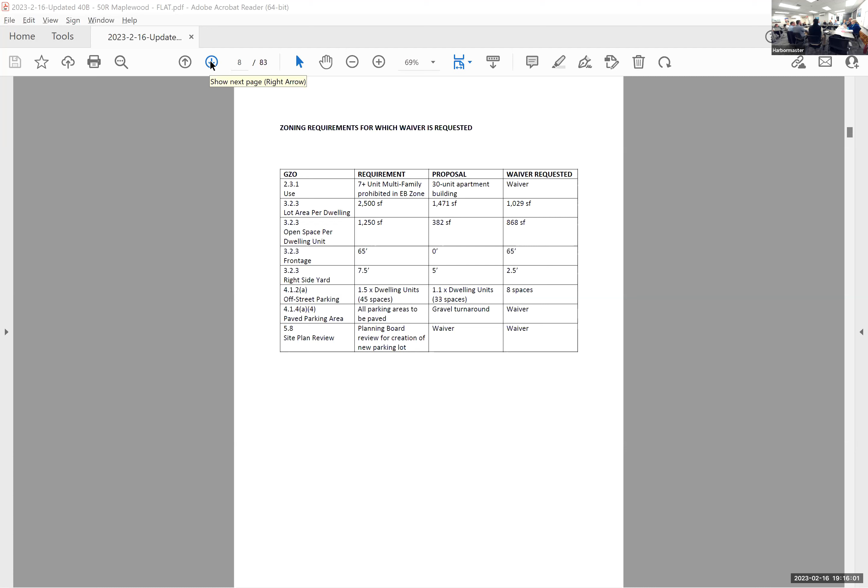So that's our updated waiver request, and I believe your outside counsel is going to speak to you about that a little bit. Hopefully her notes and my notes are close. I'll start going through the plan set, and introduce myself to the board. Hello, my name's Robert DiBenedetto, I'm a civil engineer with Hancock Associates. Our company address is 315 Elm Street in Marlboro.

Okay, so if you want to start with the existing conditions, let me know where you want to go. I believe everybody here is familiar with the existing conditions at this time. You've seen it from the previous meeting.

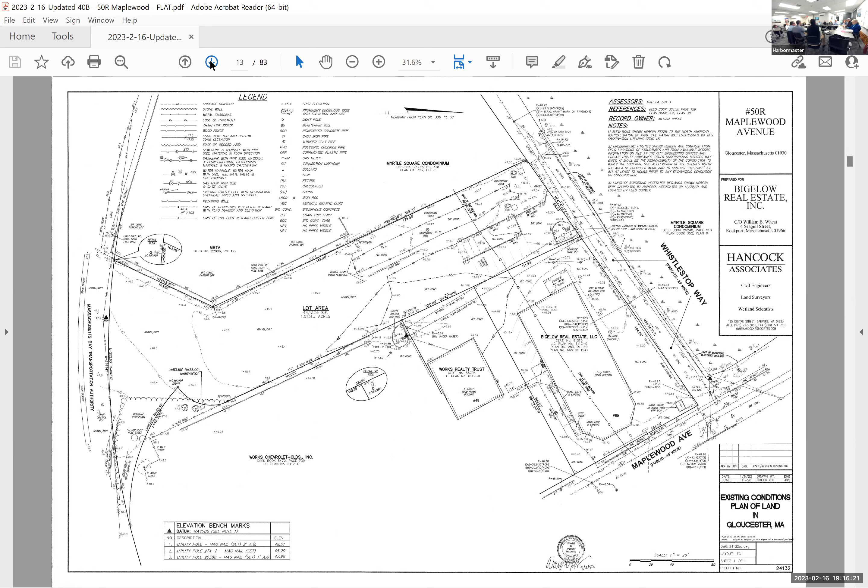So we have an open vacant lot with some previous development, some gravel and pavement that's been there for years, and old railroad tracks. Looking for a new developer.

Layout materials plan. Do you want like a laser or something to point with? I can give you something to draw with, if you'd like. See the big drawings behind you that we can read. Okay, maybe I can just point up there.

All we've had so far is an email plan, so we're looking at this big on my thing. It's a new revised plan, and we want you to tell us what's changed, and explain the whole project like we just looked at it for the first time.

Sure, no problem. Give me a zoom in, let me know. All right, thank you.

You may have noticed from a previous plan set, we had 2 entrances off of Whistle Stop Way to provide access for the Bigelow Real Estate car wash. This has now been reduced to 1 entrance at 24 feet wide, which will be full 24 feet going all the way down and back to allow for access in and out, and allow for the car wash to take their cars in and let them leave off of Maplewood. That was one of the major changes from the last plan set.

So I'm sorry, guys. What's the problem? I'm gonna try and be skillful about this, but forgive me if I skip around, I'm on a touch screen.

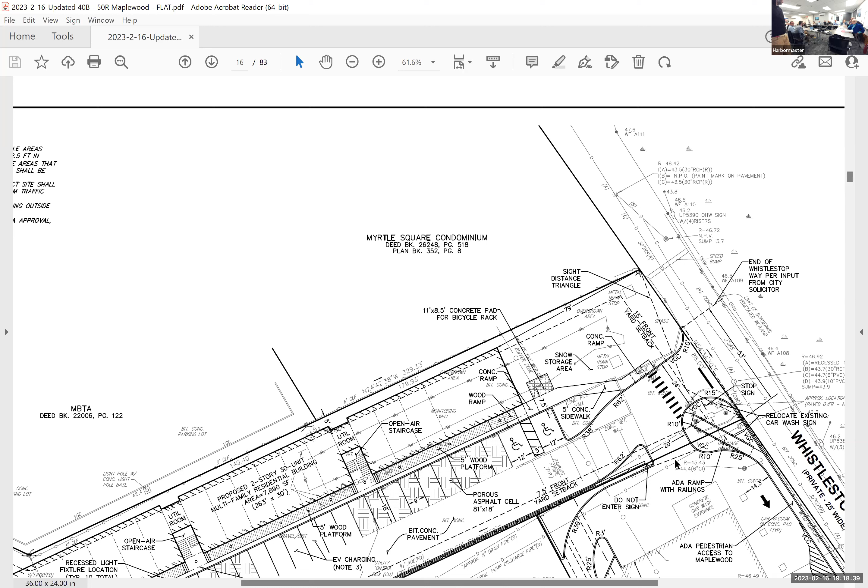And just to clarify that point, you'll see there's 88 feet - the property is 88 feet wide on the side of Whistle Stop. However, the rights to the first 53 feet of that into Whistle Stop, the way itself, are well established. That remaining 35 feet is subject to question. So rather than going through and trying to resolve that on a title issue, we've instead redesigned to just use what is guaranteed and proven rights into Whistle Stop. That's what this line and dimension represents. We're showing that 53 feet from this point here is where our driveway is going to connect with Whistle Stop, and then this would just remain landscaping on that side.

So we're proposing a 2-story, 30-unit multifamily residential building. It would be front facing to the west. We're going to have access along the front here on a raised wood platform to go into each of the lower units, and we'll have 2 sets of stairs to go to the second floor. There will be a balcony to access the second floor units as well.

We're going to have parking all along the front of the residential building, 2 handicap stalls on the corner. There will be ADA access from the stalls themselves into the first units on the right. This will specifically have a ramp as opposed to stairs to get to the door, and these will be handicap accessible units. There will also be ADA access going all the way along Whistle Stop out to Maplewood.

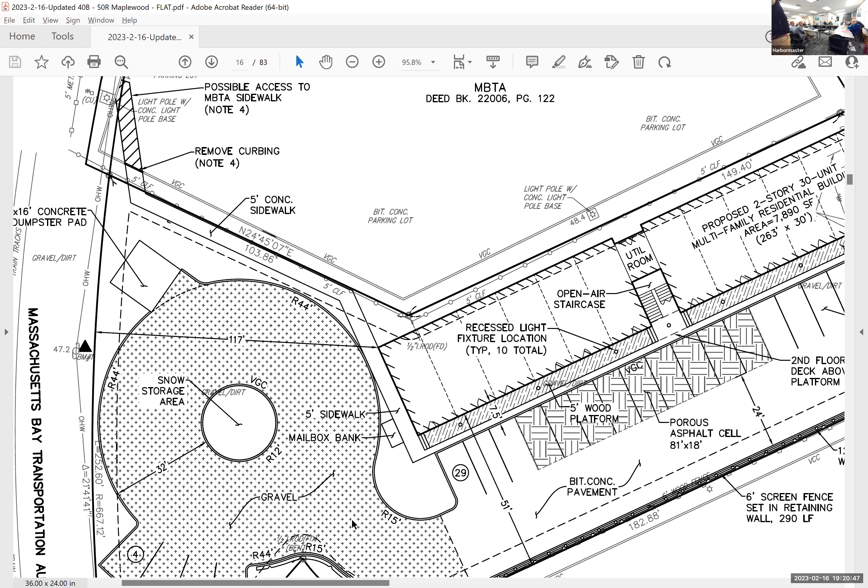There will also be a connection towards the back, going all the way towards the MBTA. That'll be access along the front and then going towards the back. We are proposing some minor work in the parking lot, however that is going to be subject to an agreement with the MBTA, which we will have discussions with them in the future. If nothing else, we'll at least have a sidewalk going to the corner of the property to allow for potential connection later.

We will have a turnaround on the rear side, specifically for our fire department. We had a swept path analysis performed, and we can show that the fire truck can make it around the turnaround and get out. Additionally, we're adding 4 parking stalls in the back for overflow parking for other ancillary needs.

We're also going to have a dumpster pad in the back, so it'll be kept away from the residents. We'll have a bicycle rack on the front, and multiple areas for snow storage throughout the site. Snow storage will be on site, nothing will be shipped off. Those areas include the landscaped area off of Whistle Stop, the center of the traffic turnaround, and this sliver corner, the triangle space above the bottom left-hand corner of your screen.

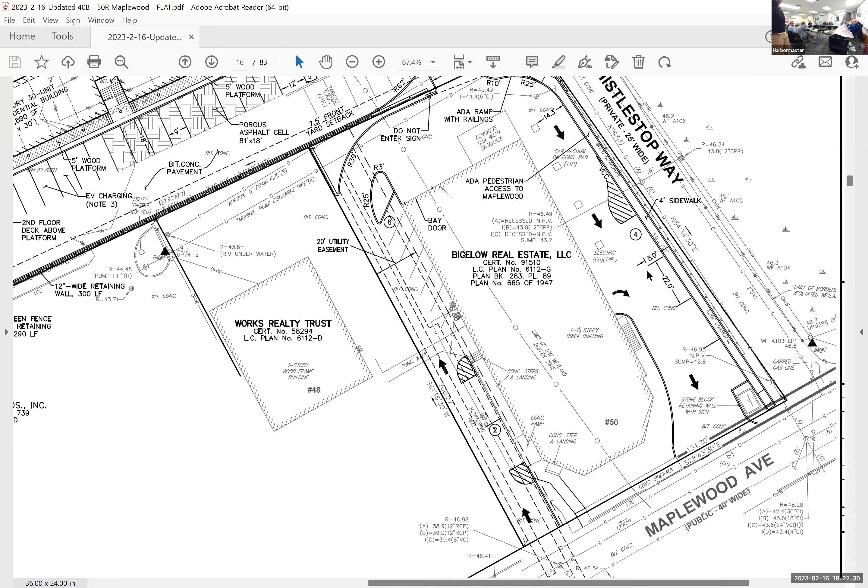There will be some additional improvements around the car wash as well. First, some redefining of parking stalls along the left side of the building. Some actual curbing put in to show the flow path for vehicles to get into the car wash or to travel around. We'll also be installing a 4-foot wide sidewalk to allow access to Maplewood Ave.

I believe that's it for this site. Next sheet will be the drainage and utilities.

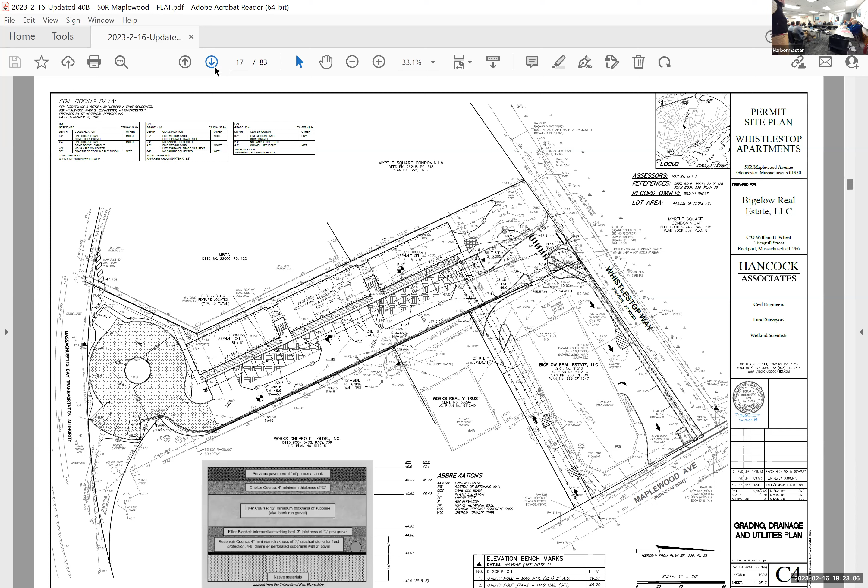Yes, this was the analysis we showed that a fire truck can get in and out, and of course the access will be from Whistle Stop. This is based on the city of Gloucester's largest apparatus, so the pumper trucks will have an even easier time. This is if the chief wants to dispatch the ladder truck to an active fire.

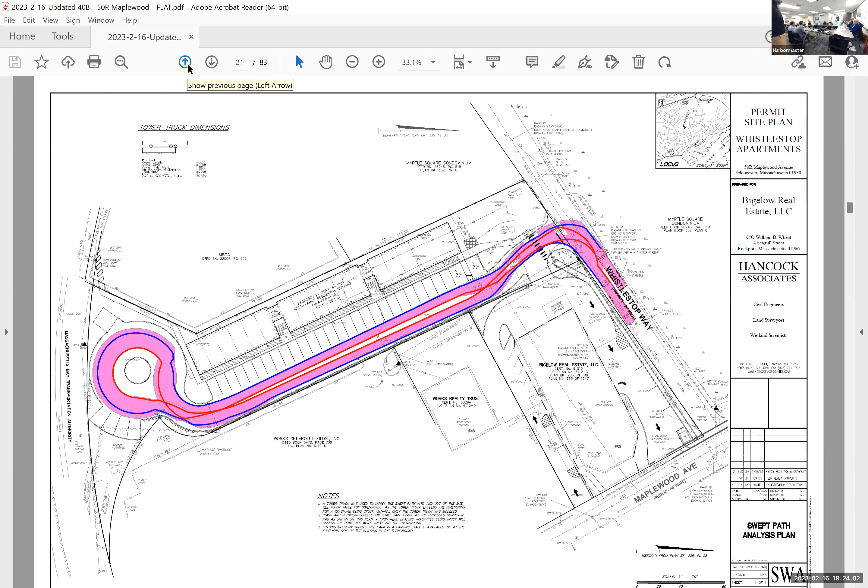That ladder truck can nose first in and nose first back out onto Whistle Stop. Because of this, we're satisfied that any trash pickup, Amazon trucks, FedEx trucks, should all have an easier time than the city's ladder truck, which, as you know from permitting other projects, is pretty cumbersome to navigate. So if that fits in and out, the rest of the trucks you'd see at a residential development should have an easy time coming in and out.

There's also a waiver for the side yard setback behind the buildings, because the fire department hasn't given any indication—we haven't heard. This is consistent with other projects permitted recently. When you're not able to provide 360 access, as long as you're able to provide adequate access that the ladder can get to the 3 sides of the building and otherwise up on top of the building, that sort of thing.

This is the utility sheet. What would you like? Let's talk about the non-drainage utilities first.

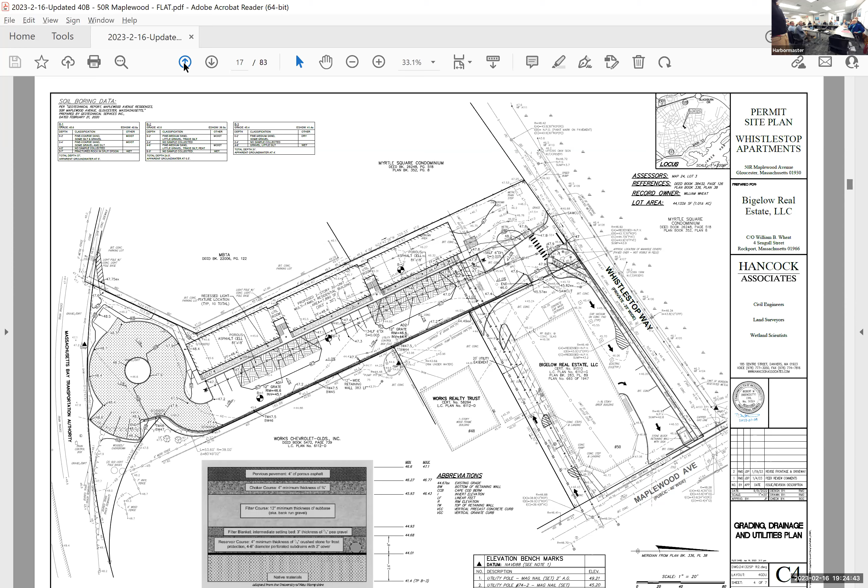Our access for water, gas, and sanitary sewer is all going to be coming up through the car wash property from Maplewood Ave, making connections out here and adding new structures in Maplewood as needed. There will be a 20-foot utility easement on this property to allow for future maintenance and access for the utility. All of these are going to make a direct connection into the building.

Additionally, we're also going to have 2 fire hydrants on site, one on either side of the building, connected with a water line. So all of their utility needs will be met with these structures.

Can you just point to where they are on the plan? Sure—fire hydrant right here to the right of the handicap stall, and then over on the left side, to the left of the last parking spot. Yes.

For our drainage, I'll keep it simple for now, and everything will be contingent on the soil testing for tomorrow. But our intent is to have 2 sets of porous pavement cells that will be located under the parking stalls specifically.

This will allow for the water in front of these areas to drain down and infiltrate in that location. The intent is to capture as much as possible to retain there, specifically the first flush.

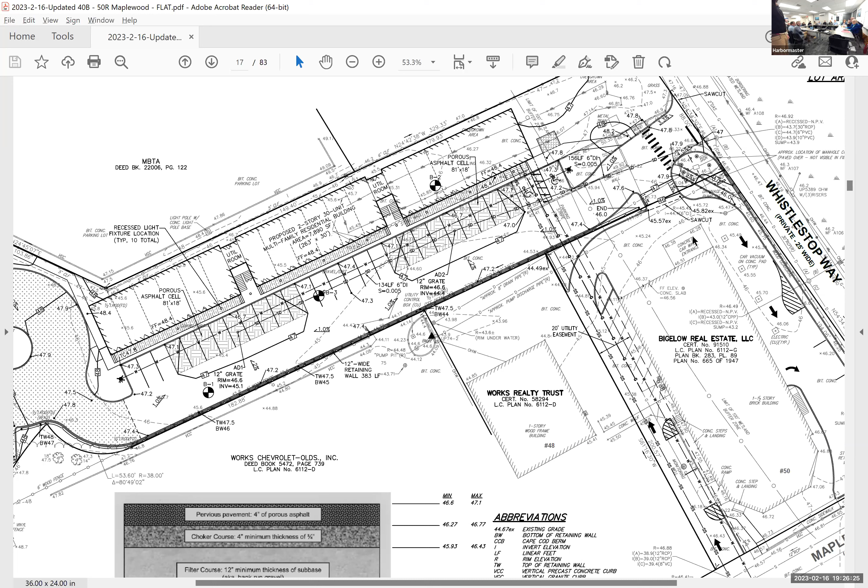Any overflow will reach a nearby area drain, connecting into the municipal stormwater system for Gloucester. That overflow will head into the existing structure in Whistlestop Way. There's a 30-inch line in Whistlestop that drains toward the east, or to the top of the sheet, and we'll make a connection there.

All other grading is going to direct all the stormwater to this area, specifically around the gravel in the back, which will all be directed towards the nearest cell.

There will only be a couple small spots where water will be flowing onto Whistle Stop or into the car wash. As part of our analysis, we analyzed the pre- to post-development conditions to see how much water currently leaves towards Whistle Stop or the car wash, and how much leaves after our development.

Anything landing on the rooftops, I believe, is going to be draining towards the front.

Although it's not shown here at the moment, we will have some kind of structures, either downspouts that go into the cells themselves, or some kind of surface drain at the top that goes over. We'll discover what makes the most sense as we move forward with the drainage design.

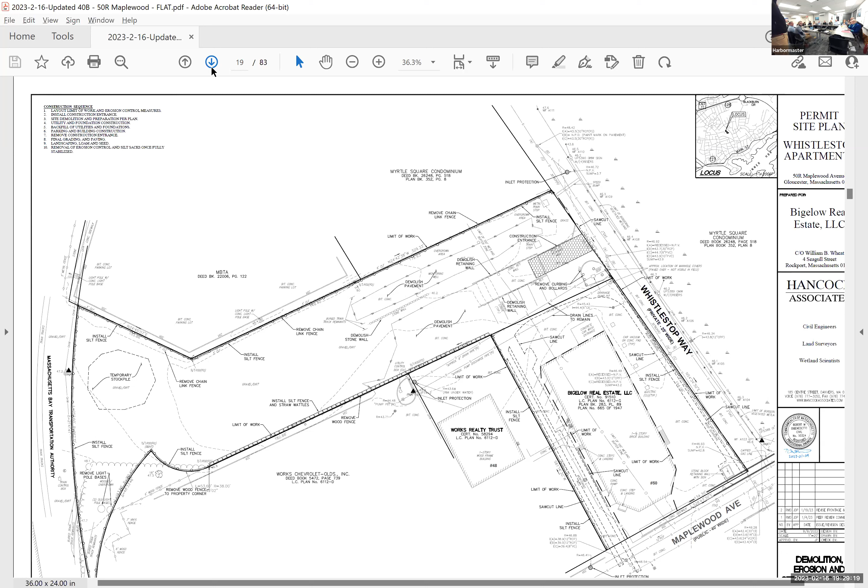The portions that are going to be removed—various pavements that have been buried—will be dug up. I believe there are some railroad spurs that are also in there that will be removed. Then we'll prepare the site with erosion control, silt fencing around the site and the project itself. Construction entrances are all pretty standard during construction.

And then we have various details beyond that, and there's the swept path analysis that we talked about before.

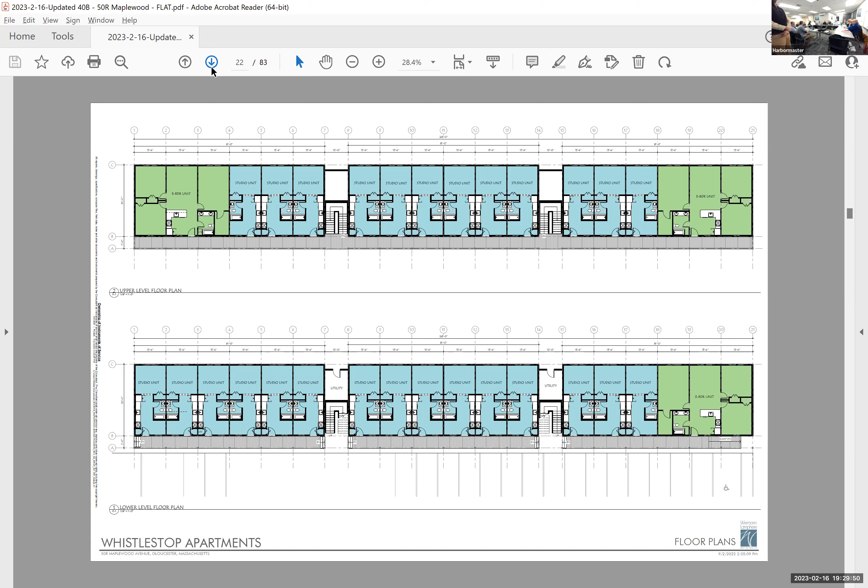This is the floor plan for the proposed 2-level building. It has not been altered since our initial presentation a few weeks back. These renderings also have not really changed since our original application—the building has not been modified to date.

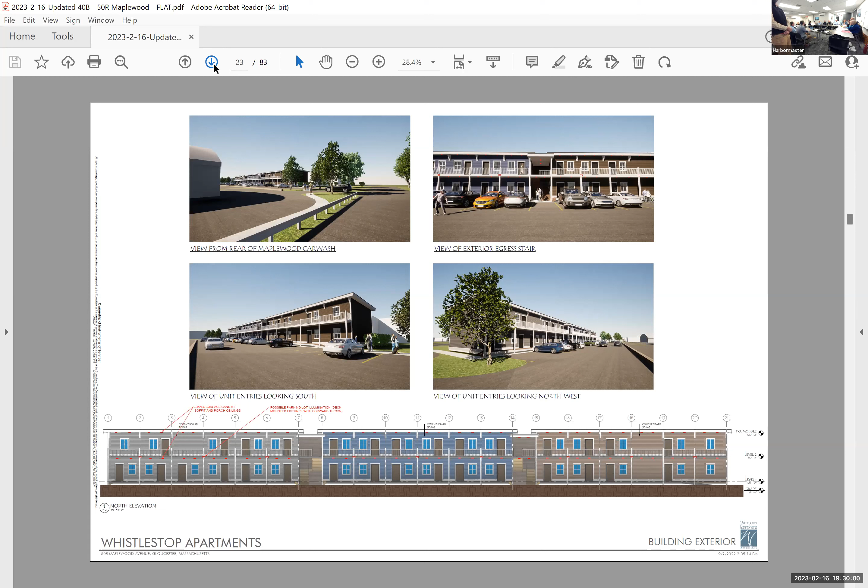That's speaking to what I mentioned earlier—there's a deed on record. We've pushed it into Bigelow, but I think that's it for the civil set.

We'd like to have our traffic engineer go through the site circulation in a little more detail. We can do that now.

Mr. Chair, before you go to that, I think Scott Turner might have a couple things—is he still on? Yes, he's still on. Can we pull up the screen share? I know there were a couple things in his letter, such as lighting, that might be helpful for the board to hear, if Scott feels it would be helpful.

One of the things we discussed—we covered everything in my letter, including lighting.

Typically what I prepare when designing projects, and look for when reviewing them, is a photometrics plan that shows light intensities on the site. The reason for that is to show the site is lighted appropriately and safely, but also to understand if there's any light glare or spillover into adjacent properties.

So we talked about that, and we emailed back and forth a little bit yesterday about their approach.

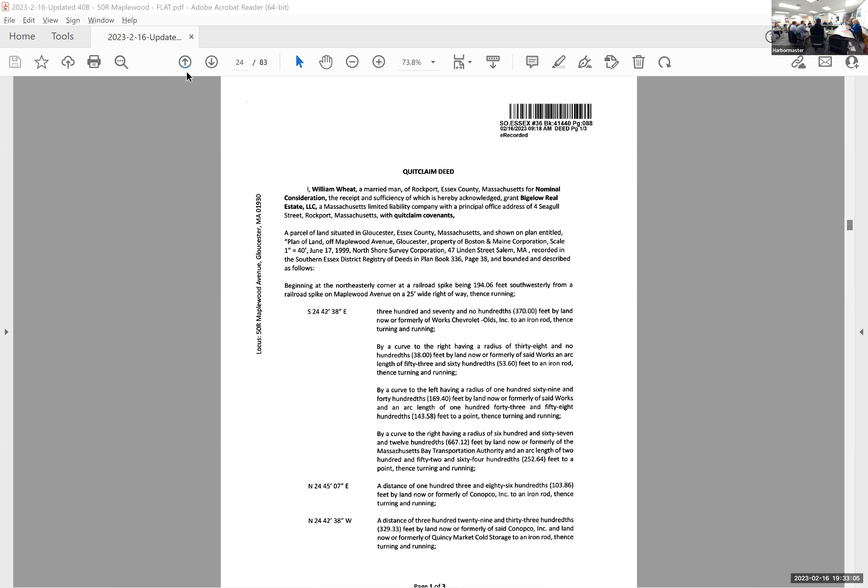I prepared the traffic impact assessment that has been submitted and that Mr. Dirk, my dear friend, has reviewed. There's only so few traffic engineers in the Commonwealth. It's a very simple project, one way in, one way out.

We went out and did some inventories. We got the conditions on Maplewood, got some traffic volumes to find out how much traffic was out there. In terms of numbers, we did our counts in November 2022.

We seasonally adjusted them because November volumes were slightly lower than average based on available Mass DOT data. We did not have to perform a COVID adjustment. Mass DOT issued a statement that as of March 2022, traffic volumes no longer have to be adjusted for COVID variation unless you're in an area of high office content. As you can see simply by this meeting, we're hybrid, people are at home watching this and not driving as much, particularly to work. Even Mass DOT is on a hybrid work schedule to this day.

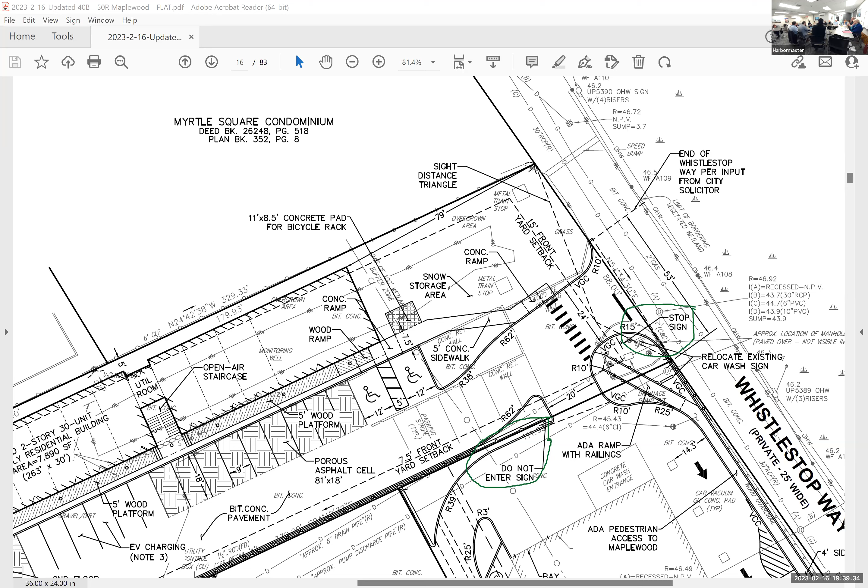And then we have a little transportation demand management where we'll try to get people to carpool and so forth, or use public transportation. Give them a welcome packet that tells them here's the public transportation services in the area that you can use. And of course, as Rob mentioned, the sidewalk that will go out to Maplewood and the sidewalk that will go, at least right now, to the MBTA property. Hopefully they'll be able to work with us and we can have a full sidewalk into their property.

So that's a summary of where I stand right now. And I just received this morning Mr. Dirk's letter, which I'm sure he will summarize and we can have some discussion on.

Thank you. At this time, I guess we'll stay on traffic, and so our board knows Jeffrey Dirk is our consultant on traffic. He can tell you what his company is. And I know reading his report, there's a few areas of concern.

Yes, and thank you, Mr. Chairman, members of the board. For the record, my name is Jeffrey Dirk. I'm a managing partner with Vanasse and Associates, and as you heard, we're the city's transportation consultant on the project. So we've issued two letters for the board's consideration, and sort of what you heard from Scott, he and I kind of tag team as they relate to the site plan. So I'm going to have some comments as they relate to the site plan.

The comments on the site plan, as I'm looking at it from a transportation perspective, really looks at access, circulation, and parking. Those are kind of the things that are applied fairly. So you'll see some of this overlapping with some of the comments you heard from Scott this evening.

We also have comments on the assessment that Mr. Cram had presented. So the initial set of comments we provided were based on the original site plans, which have since been revised and presented to you. The intent of those comments was to offer the designer our first pass on things we would like to see on the site plans to improve access and circulation, and a lot of what you heard tonight addresses those.

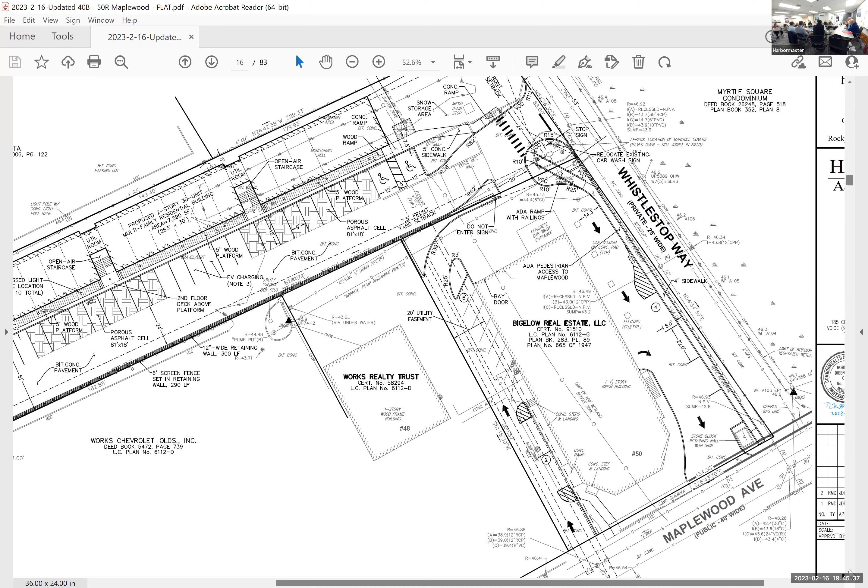As Mr. Cram mentioned as part of his analysis, he did a review of parking demands based on comparable types of developments. The Institute of Transportation Engineers, which he mentioned, publishes studies of data collected at similar communities. They do it for trip generation purposes, so they have information for multifamily developments such as this. If we know how many units are proposed, they have several hundred studies we can look at to estimate how much traffic will be produced.

They do the same thing for parking. They publish information for multifamily developments so you can estimate what the peak parking demand is going to be on any day of the week, including on the weekend. So they've undertaken that level of analysis for the project.

What that analysis says is actually pretty consistent with what your zoning bylaw is, and what I've recommended in my letter to you is that for multifamily you typically want to have a parking ratio of 1.5 spaces per unit, outside of downtown Boston, sitting right on top of a transit station. And there's a couple of reasons for that. The first is that we need to accommodate guests.

I think the most important thing as we look at the suburb area, sort of where we are, although there's a commuter rail station right next door, that doesn't mean that I can't own a car, or that I don't need to own a car and live here.

I may choose to leave my car there and use the commuter rail to go to work, but I need a car to get my groceries and to do other things. That's unlike if I'm in downtown Boston, where I'm walking to the corner store for groceries. That's not the same situation you have here.

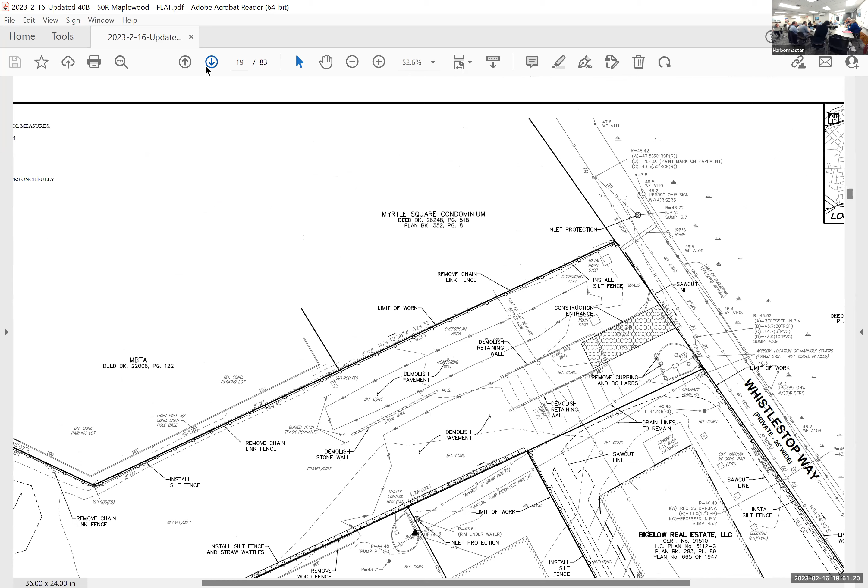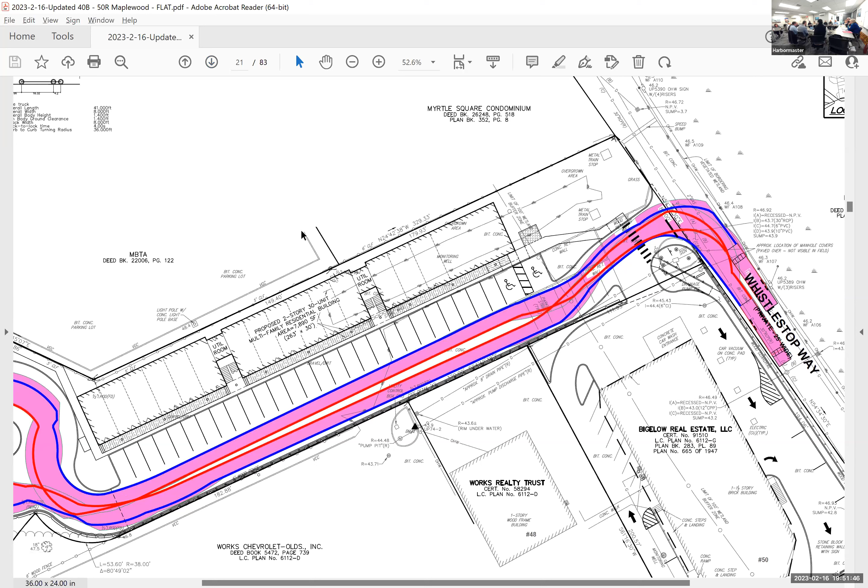When we're looking at the structural pavement section, the weakest point is the edges. And if you have weight on the edges and you don't have anything on the side to support it, the pavement flushes off, it starts to push off to the edge. You start to lose subbase and everything if it's not adequately retained. We know there's wetland, tidal or otherwise, but we know vegetation comes right up to the edge.

So what we've asked the applicant to undertake is to answer: what is the structural condition of the pavement? Can it support the travel emergency vehicle? And I think it's not just supporting it, it's can it support it to make the maneuvers shown out here, that swing wide and then come back in. So we've asked them to help us understand that.

We've also had some difficulty, and I don't know if the board has had the same difficulty, understanding where the edge of pavement is. Typically we have a very good defined line that says this is the edge of the travel lane. It seems like it might not be defined very well, and I apologize if I'm not reading the plans correctly, but what I'm seeing is kind of an edge with a squiggly line, and you might have to take a magnifying glass to it. I think what they're saying is it's variable width.

So there's a couple of things that relate to Whistle Stop Way that I think they've demonstrated the fire truck can get in, but the question is really, can the pavement support that vehicle coming in there and the repeated loadings that may happen as it relates to it.

The other thing I'm looking at, and again it would go to the fire department, is the turnaround area that's going to be gravel, and how comfortable they are with that. It's got to be maintained, and maybe it's just something the applicant provides some more information on the structural condition of the gravel surface that will be there. And again, it goes back to the heavy apparatus needing to go and make the turns.

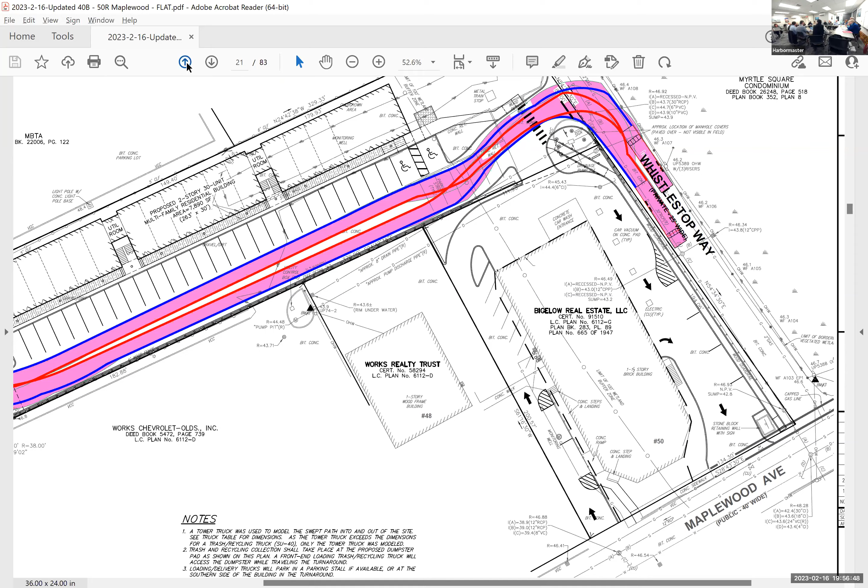And then I think it's really to counsel and to the board - the car wash, and how do we deal with that? Is it a part of the review of this project? Because I think both Scott and myself would need to drill down more and provide some comments on the car wash. But I think what you've heard from my presentation tonight is they are interrelated and need to work together if this is the access configuration.

So with regard to the initial review, is point 2 and 7 still open in your mind? We've closed a number of the discussions satisfactorily, but I still see 2 and 7 as open issues. Yes, 2 is still open and that deals with the vehicle turning analysis, and 7 is the parking. Right, okay.

Potentially recommending - that'll be something we're going to hear from our counsel on in a bit - about whether we need to consider both parcels as part of one project, because obviously we have to drive over one to get to the other. And I never even thought about how the car wash backs up in good weather. But I noticed it on Railroad Ave the other day - there was about 10 cars back there. So interesting. Appreciate your feedback so far.

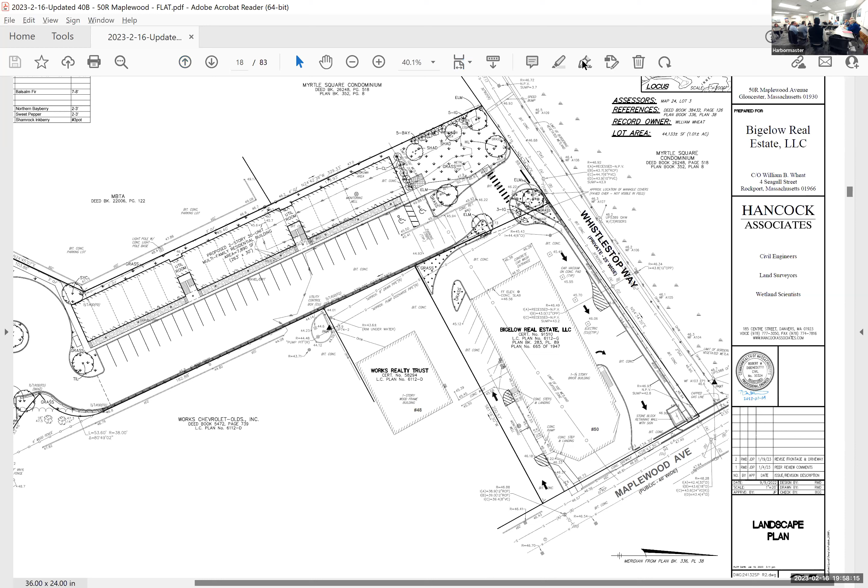Mr. Chair, would it be possible for us just to touch upon a little bit what was just discussed? Sure, sure. So I appreciate that. I think, agreeing with what Mr. Dirk just said, the majority of the comments are just a matter of sharpening some pencils and dialing it in. The one piece I'm going to respectfully push back on is the number of parking. To be quite frank, we think this is overkill as it is.

Mr. Wheat owns 50 - there are 4 apartments there. Of those 4 apartments, 1 car. We do not expect in reality that the tenants of this property are going to be having 1 or more cars per unit. In fact, we think one of the appeals of this unit is that it's going to be walkable to downtown, walkable to Shaw's, walkable to the train station, walkable to any number of retail and commercial jobs in the downtown area. And given their modest size and the modest rent being charged, we do not think you will even see a 1-to-1 ratio of cars to apartments in this complex.

Another conversation we actually had at the planning board stage when they were providing their review - one of the comments a couple of the planning board members kept coming up with was, if you eliminated some of these parking spaces, you could add some green space. We really don't think there's going to be that many cars.

With all due respect to what the national and international studies show and the typical rules of thumb you get as base guidelines, I think it's important to remember that this comes down to local control, because you as the local zoning board understand Gloucester as residents and members of this board. The idea that there's going to be 45 cars attributable to these 30 units, I don't think is realistic.

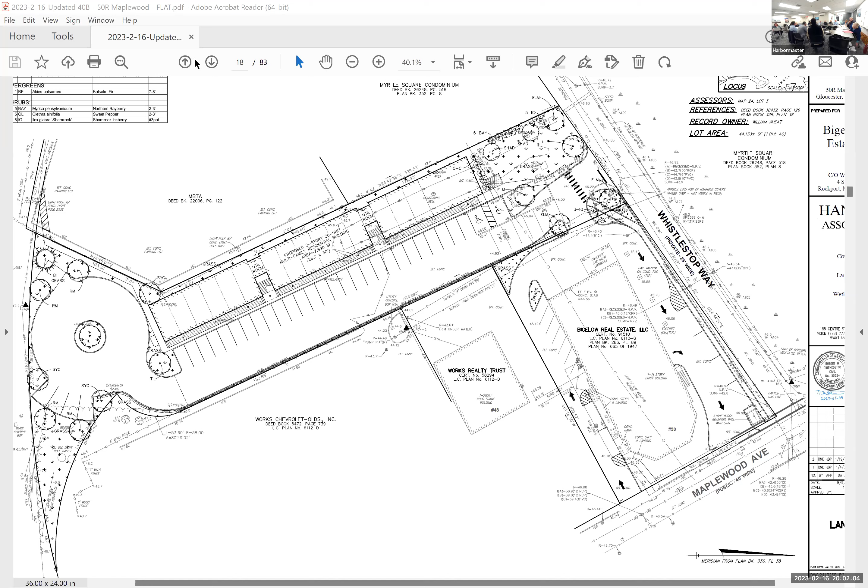Sure, do you have the cover sheet, because that has the zoning tabulation and the requested waivers on it? The cover sheet has the zoning analysis as far as setbacks and that type of thing. Was that just revised in the new application? Yes, I think we're good on these. If you go to the left side of the plan, that's the waivers, and on the other side there's the tabulation. Let's talk about it, it's a little hard to see since it's small, but we can just talk through it.

As you know, this is in the Extensive Business district. Multifamily housing isn't typically a use that's allowed in the district, so a waiver is needed to allow the use. The way your bylaw reads, in section 3.2.3, if you have multifamily dwellings that are non-conforming in the EB district, you look at the dimensional requirements for the closest residential district where multifamily dwellings are allowed. I had talked to your planner, and he said that would be R5.

So in the zoning tabulation, that is what the applicant has done, right? Under section 3.2.2 - I apologize, I said 3.2.3 - there are the zoning tabulations for R5, and those are set forth in the zoning tabulation for what would be required. It might be helpful if you do another draft of the cover sheet to reference that R5 is the section being applied, that would be helpful. These are the provisions, and they show what is proposed here on the right, and it shows the various waivers requested, which we can get into more detail on.

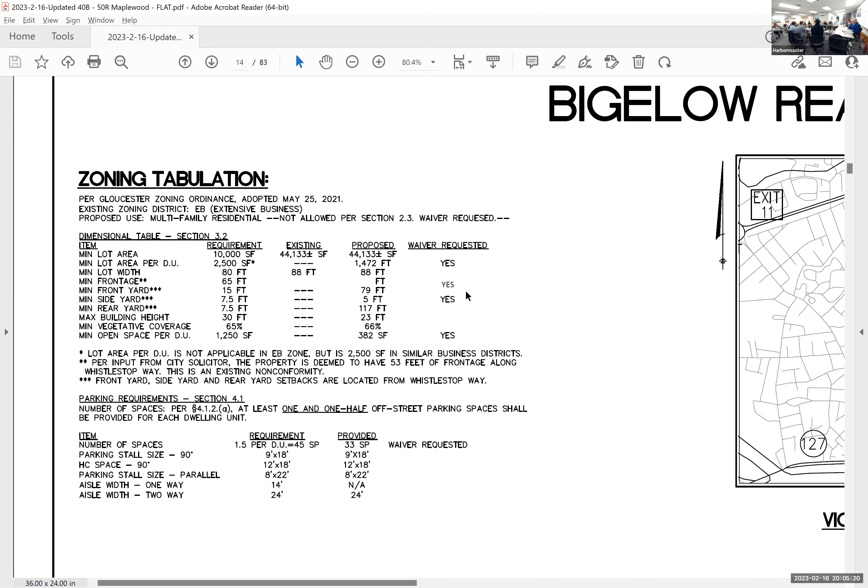So if you go over to the other side, let's walk through the waivers.

So the first would be, I believe, the use. And then we get into, it says 3.2.3, but I think it's 3.2.2 - maybe we can confirm that. Multifamily dimensional requirements for multifamily dwellings and their accessories, 3.2.2. These are minor cleanup items that we can confer on if necessary.

So the arithmetic remains the same. Yeah, the citation's what's incorrect, that's what I'm saying - I don't think the outcome changes. It's just a matter of getting it right, so that when the board gets to the point of making decisions, we have all the i's dotted, reflecting the frontage, etc.

So everything that we just talked about - but I think if I have the list correctly, you're talking about use, frontage, side yards, lot area, open space, parking spaces, and then the driveway one, I think, goes away now because you only have one driveway, assuming you keep only one driveway. Yes. So there is a driveway one about the composition.

The parking ordinance requires asphalt throughout, and for drainage purposes we're proposing gravel turnarounds, which requires a waiver. The last one is that all driveways shall be separated by at least 30 feet. Does that go back to when you had two driveways? Yeah, so that went away.

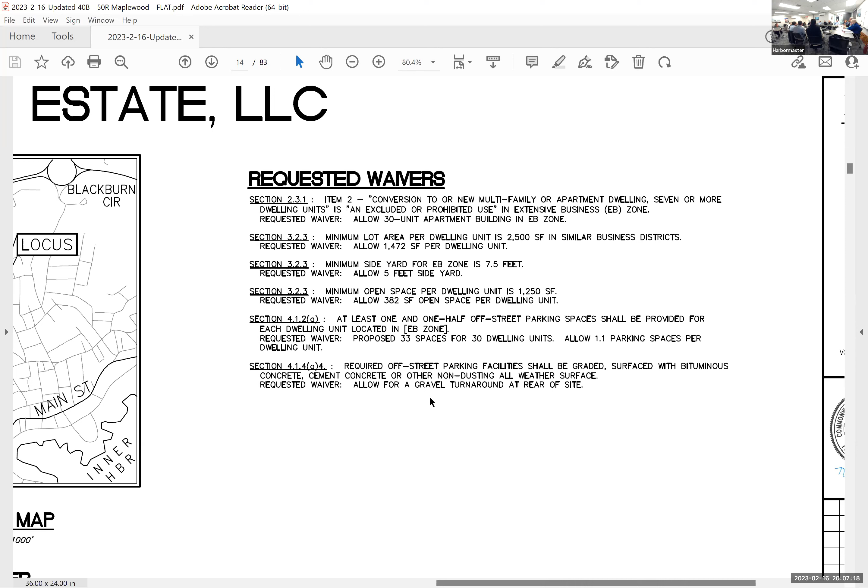So I think it's just going back to these two tables on the cover page here, and updating them to match what you presented. And those are the waivers requested.

I haven't identified any additional ones that might have been missed by oversight. I don't believe Scott identified any additional ones either - Scott, if I did miss something, you can tune in, but you don't have to if we didn't miss anything. So that's where we are on waivers - it's a fairly short list. Yeah, he didn't state any others in his report.

The only other complication, as we decide how 50 is being analyzed, is that if 50 is being pulled into this, then we would need a waiver from section 5.8, which is site plan review. If 50 is left as a condition that has to be retooled, then we would go to the planning board separately for site plan review after this. So that's again a matter of the direction the board decides to take. If 50 is pulled in and essentially permitted through this, then we need a waiver from section 5.8 to excuse it from site plan review.

Except to the extent that if it is brought in, then the zoning board would act as the site plan review authority, so it may be that it qualifies by covering it - we certainly have traffic engineers looking at it. So we can talk about that more if the board would like, but the waivers are pretty straightforward.